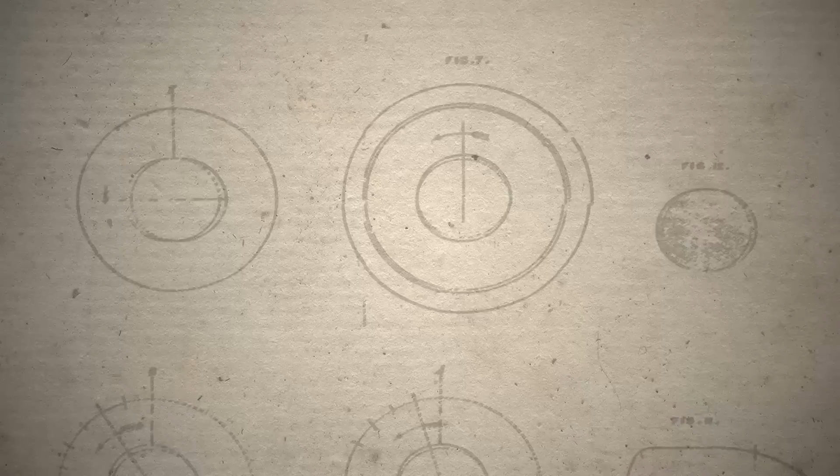In 1850, Charles William received a British patent for a unique form of rifling resistant to black powder fouling and easy to keep free of rust. Well, I say rifling, but it was more the production thereof. This was oval bore, which had actually been patented before, but Lancaster's patent was tightened down on exactly how to machine it, and machine it well.

An oval bore rifle has two opposing twist grooves, which are then rounded at the edges, so much so that it can be difficult to make them out. You'd be forgiven for thinking an oval bore was actually a smooth bore without measuring it. This nearly smooth bore did a couple of things: it was very hard to foul up, easy to clean, and it still allowed you to use shot cartridges, which could be popular. Still, it did impart rotation to bullets, enough to provide for good shooting. Oval bore would be a hallmark of Lancaster firearms for decades to come.

In 1870, Charles William took an apprentice, Henry Alfred Alexander Thorne. Born in Kensington to a coach-building family, Thorne apprenticed at Lancaster at the age of 16. In 1878, Charles William passed away, and Thorne bought up the business.

Unlike so many others, though, he didn't change the name on the sign. He knew that Charles Lancaster was a legacy, and under Thorne, it grew even more famous. In terms of public marketing, he basically abandoned his own name in favor of Lancaster's fame. In 1889, he even published a book, The Art of Shooting, under the pseudonym Charles Lancaster.

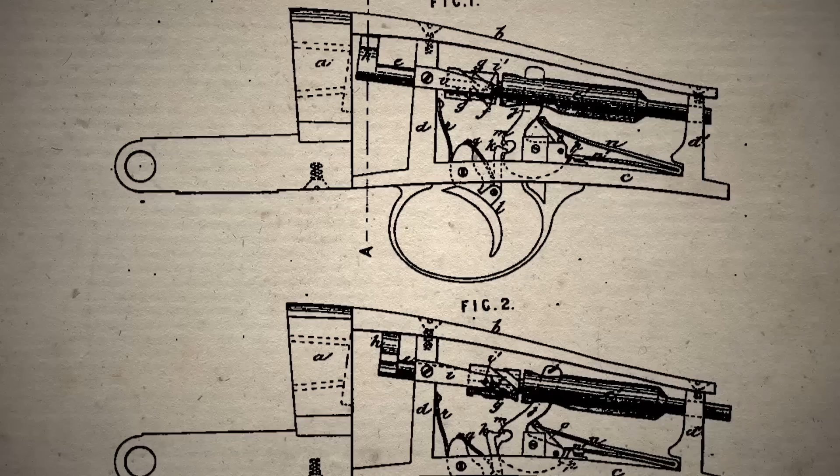Thorne also didn't simply rest on that old reputation. He looked to grow it and developed a number of improvements to the products. For today's episode, we care most about his patent of 1881 for multi-barreled firearms using a singular lockwork. The images and text focus on long arms, multi-barreled shotguns and rifles, but make passing mention of pistols. This lockwork actually uses an unusual barrel-shaped set of cam tracks which were indexed by a fixed pin on an extension. This, with some refinement, would find its way into our pistol today.

During 1881 or perhaps 1882, the first pistols built on this patent were released to the commercial market. These were large-framed, square-topped, double-action pistols with 4 barrels. The opening lever, set on the left side of the frame, worked an internal latch. They also had floated firing pins, one for each chamber, which would be smacked in sequence. Thorne seems to have further improved the design fairly quickly, making the early pattern hard to find. We don't have one here today.

More common is this, a slightly smaller framed, more ergonomic 4-barrel pistol, which emerged about a year later. It's probably best if I just go ahead and show this to you instead of trying to explain it all in the ether. This is a beautiful looking handgun. I mean, it's very plain on the outside, definitely no snag risk there, and who isn't excited about those 4 barrels? But what are we actually dealing with here?

Well, we have a double action trigger. We'll see more on that in a moment. And we have a latching top break mechanism, just like a top break revolver. As a matter of fact, if we look at our latch, for those of you familiar with our Tranter 1879 episode, this guy's no surprise. We just go ahead and pop that, and yeah, that releases our lug. We have it on both sides.

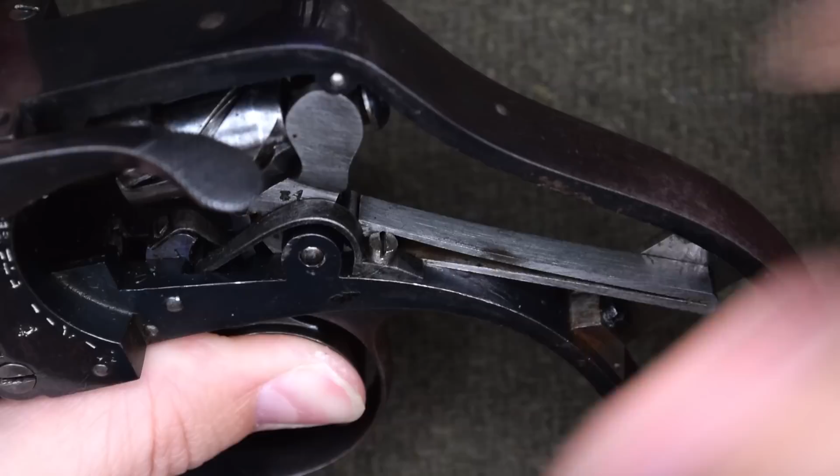At the bottom side, it's a little more difficult to see, but we have an auto-rebounder. This will be familiar to those of you who saw our Webley number 4 episode, in that as we go ahead and fire the system, you may see it start to flex a little bit at the bottom there. Whenever this guy goes forward, it's going to over-travel slightly, and the bottom of the hammer is going to slap this.

It's probably not even easy to see without high speed, but it's going to immediately put counter pressure on the hammer so that even as the firing pin is going over center and striking the cartridge, it's going to head and spring back just slightly.

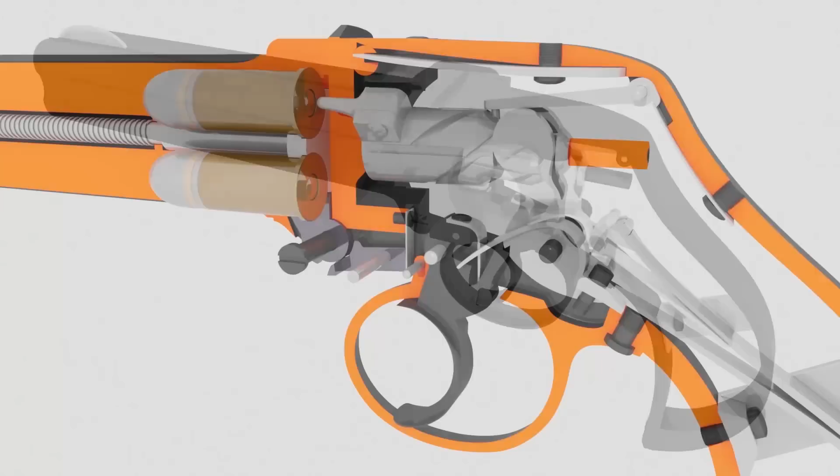Pulling the trigger presses the strut into the hammer. As the strut slips past the notch in the hammer, it falls, discharging one of our rounds. This overarching flat spring returns the trigger on release. Its unusual shape was necessary to squeeze the action into such a small frame.

And just in case you're curious, this is the strut spring, keeping it biased into the hammer, which is of course powered by the mainspring. The upper half presses the hammer stirrup, constantly biasing it towards the cartridges. The lower half presses mostly on the frame. However, this extension off the hammer is capable of also compressing the lower arm of the spring.

When we fire the pistol, the hammer falls and its tail rises at the moment of discharge. The tail acts on the mainspring's lower arm, lifting it off the frame slightly. Once the inertia is lost, this spring tension returns the hammer to a rebounded state, with the firing pin retracted.

All right, that's the simple stuff. Let's get a look at the firing pin assembly, what Thorne called the hammer bolt. Riding in the tines of the hammer is the firing pin assembly spindle. This is what allows the hammer to guide it forwards and back.

On its surface, 4 helical cam grooves and 4 straight tracks. The grooves interact with this overhanging stud, which in turn is powered by a flat spring. And of course, finally, at the other end of the assembly, is the firing pin, offset and a bit difficult to see just now.

Keeping our eyes on the drum, we can see that pulling a trigger cocks the hammer back, drawing the drum rearward. As it travels, the overhanging stud forces it to rotate a quarter turn, before the stud moves into one of the linear grooves. When the hammer falls, the drum does not rotate, and the firing pin hits the next primer, discharging the pistol. Let's see that trick again. It's actually quite simple.

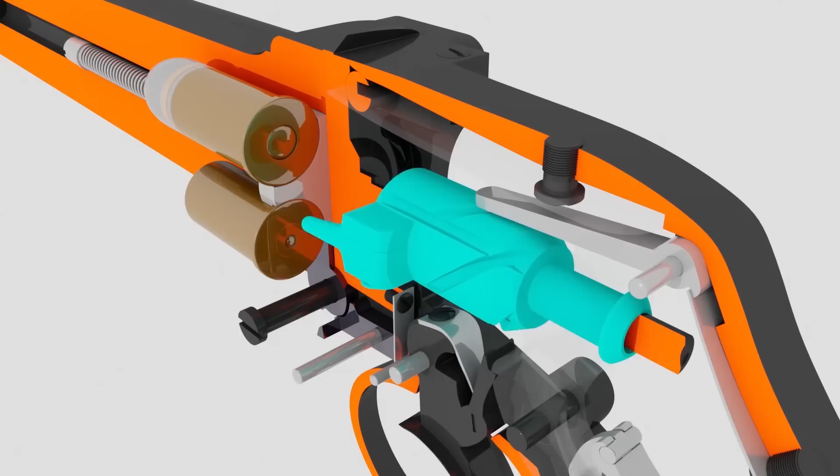Before we open this action to extract, let's get a look at the pieces involved. This is the extractor itself, taking up 1/4 of each of the chamber's rear, and supporting a portion of each case rim. It's constantly held flush by this coil spring.

When we open the action, the spring will be overcome by this lever, which will be kept from rotating, for a time, by this odd T-shaped clutch, which in turn is biased into the hinge point of the pistol by this flat spring. Got it?

Let's watch. As we open the pistol, the extractor initially stays with the barrel assembly. However, a notch in the lever bottoms out on the clutch. This prevents the lever from rotating further, and thereby pries out the extractor, which in turn pulls out the spent cases. As the barrel assembly fully opens, its underside strikes the wings of the clutch, forcing it to rotate slightly away from the hinge point.

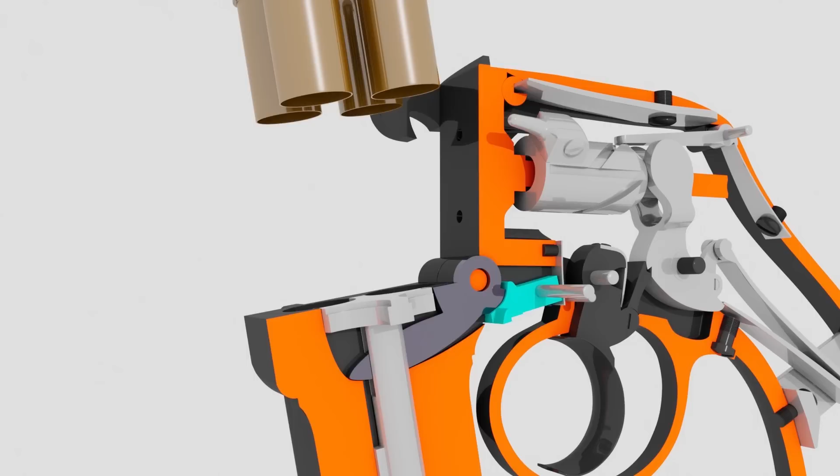This frees the lever to suddenly rotate, and the extractor springs back flush, ready to be reloaded. Alright, that's it for now. Let's go shoot it.

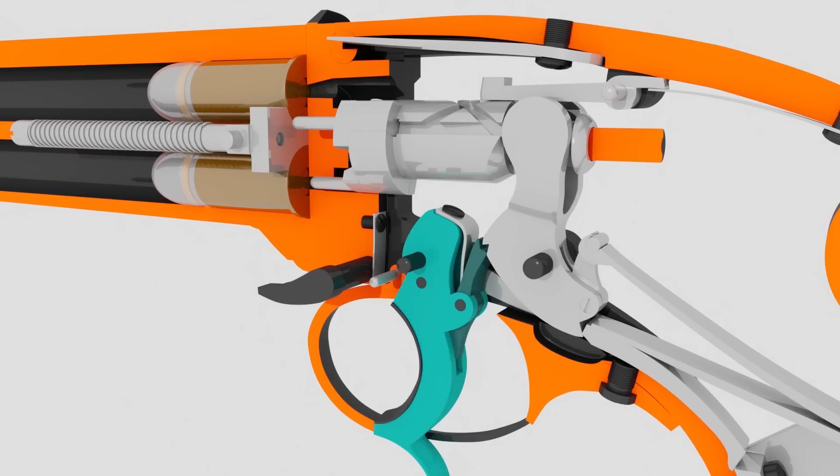Here we have the lower trigger, to which is attached the strut, again powered by its own flat spring. Pulling the lower trigger presses the strut into the hammer, cocking it back, but not far enough to let the strut slip past. Using only the lower trigger, the lockwork cannot be fired. Releasing the trigger will also ease the system back into its rebounded state.

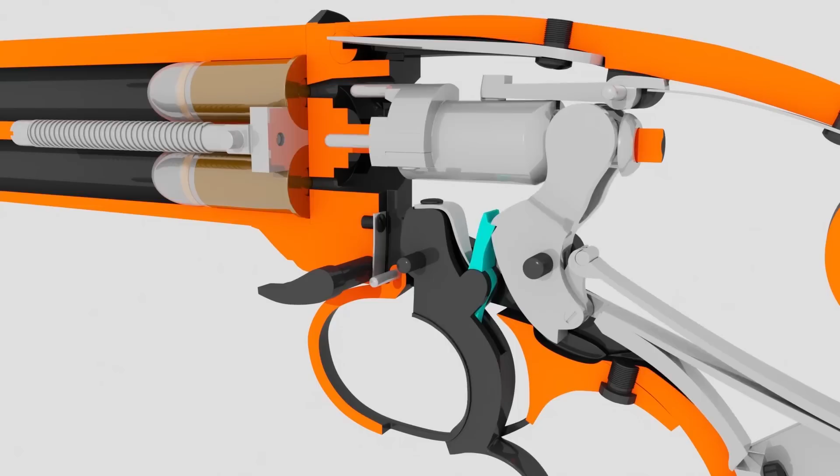So, in order to fire, we must pull both the lower trigger and the upper trigger, which further tips the strut, allowing it to clear the hammer. By the way, while we're still holding the trigger, take note of the introduction of a new rebound arm. Powered by the lower mainspring, this wraps around the hammer and puts pressure on the trigger via the pin for the strut. And of course, a shelf set in the same arm will rebound the hammer as we release our grip.

Extraction is similar to the 4-barrel, with some necessary changes. The extractor itself is now designed for 2 chambers, and its pin and spring rest inside a tube on the left side of the barrel assembly. The lever arm can no longer fit down the center; instead, it rides to the outside, with a square hole set around a guide pin. The lever, of course, bottoms out on a clutch, again now projecting to the left side as a simple flipper and powered by its own flat spring.

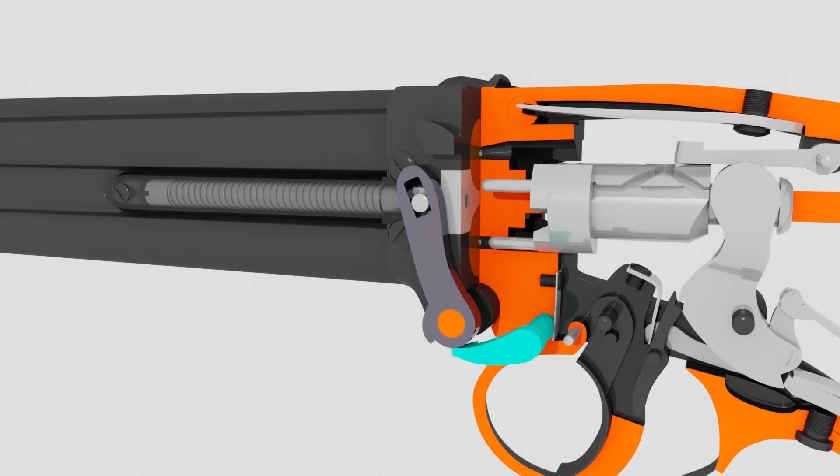When we open the action, the lever follows along until it bottoms out on the clutch, prying the extractor against its spring, ejecting the 2 spent cases. Once the frame opens enough, the barrel assembly rotates the clutch, which frees the lever and extractor to spring back flush for reloading.

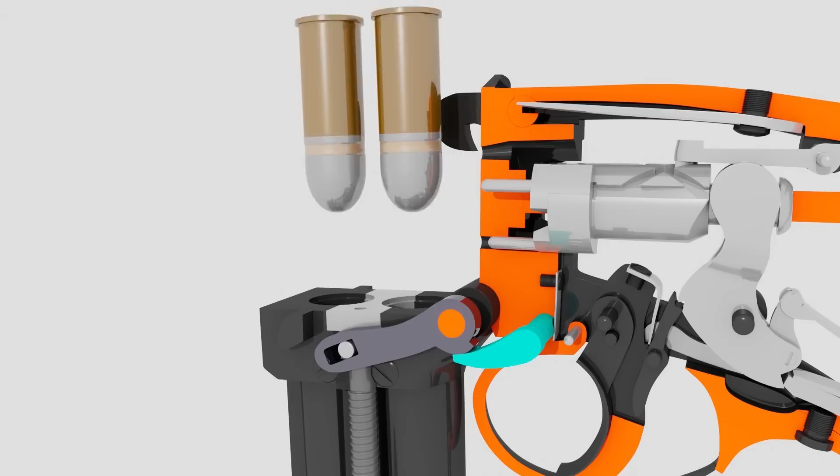Once again, we have a firing pin assembly, which features camming grooves and an overhanging spring-loaded stud to drive the rotation. We also have a pair of firing pins, one aligned with a chamber, and the other aligned with a blind hole. This is just a recess which allows the unused pin a place to go.

From the rebounded position, cocking the pistol does not rotate the drum. The stud simply travels in the straight groove. So long as we never actually fire the pistol, the pin will not rotate. That's because only when fired does the drum travel forward enough to admit the stud into the next cam track, one of 2 diagonal cuts, each responsible for just a quarter turn. First one way, and then after firing again, back the other.

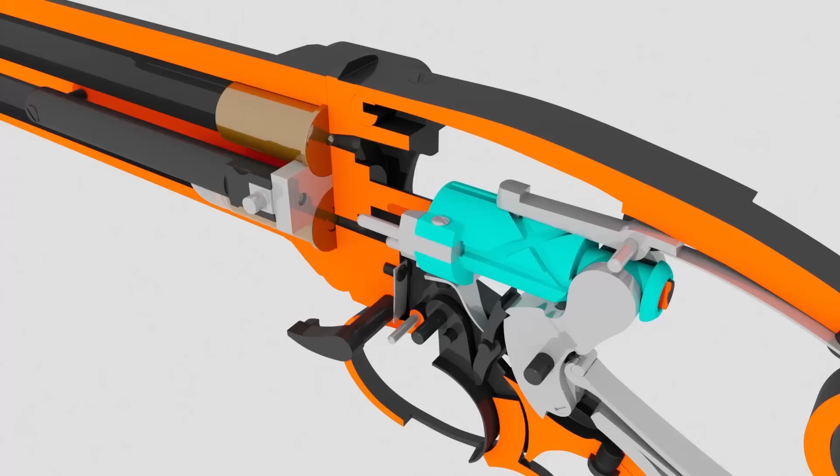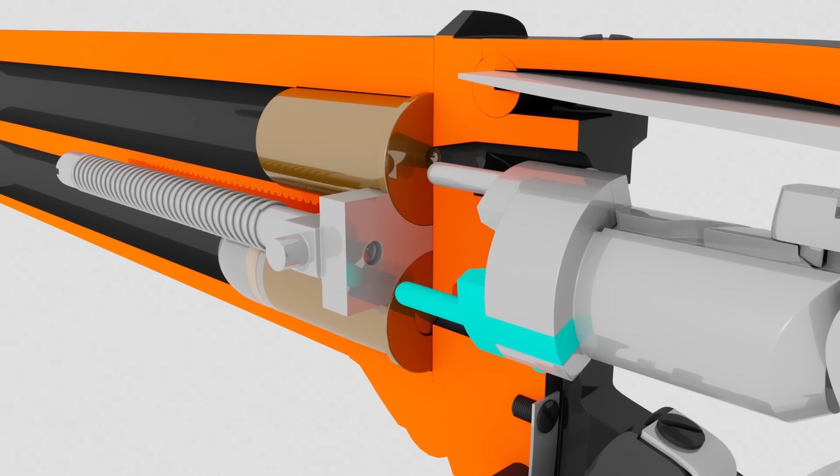Just to be clear, this means the firing pins alternate positions: one discharging one chamber, then the other discharging the second. Brilliant. Let's go shoot it.